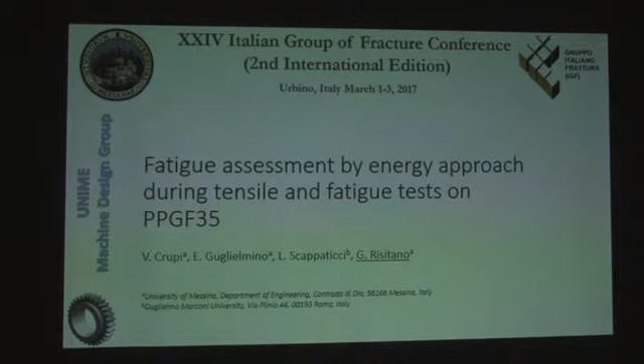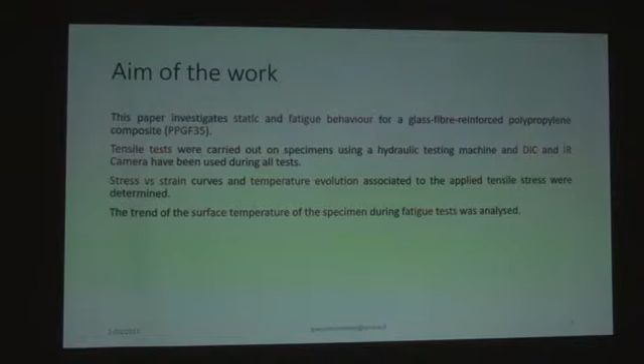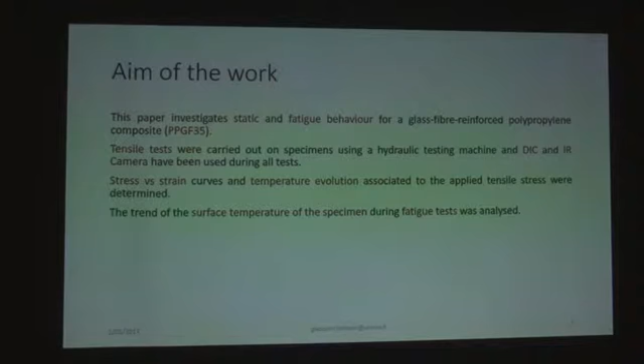For this work, tensile test and fatigue test were carried out with the hydraulic testing machine, and during all the tests we used an IR camera to measure the surface temperature, to detect the surface temperature evolution during all the tests, the tensile and the fatigue test.

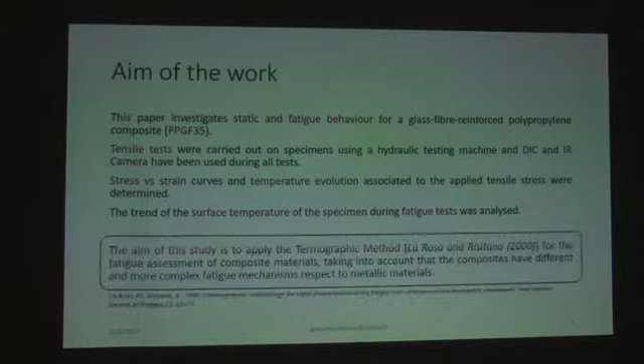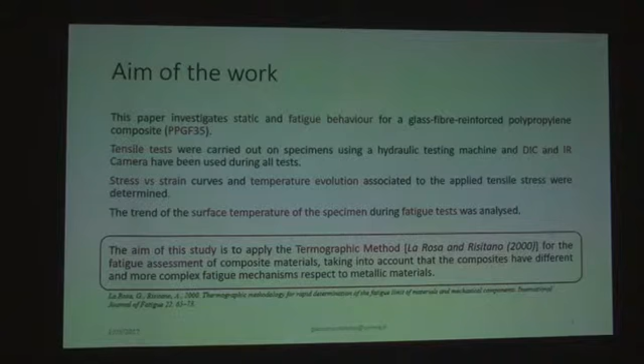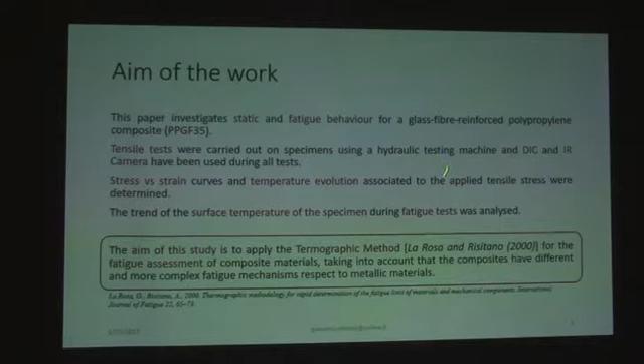The aim of our study is to apply a thermographic method presented by La Rosa and Risitano 17 years ago for the fatigue assessment of this material, taking into account that composites have a different behavior to more complex fatigue mechanisms with respect to metal materials.

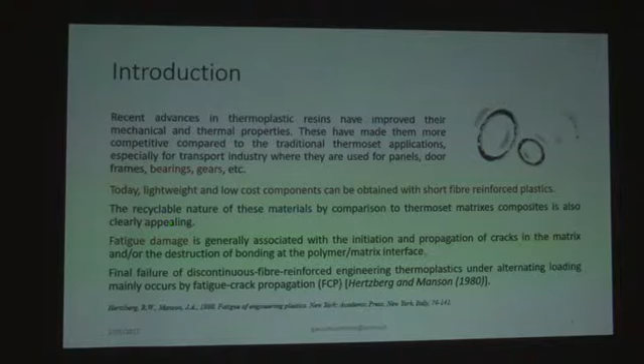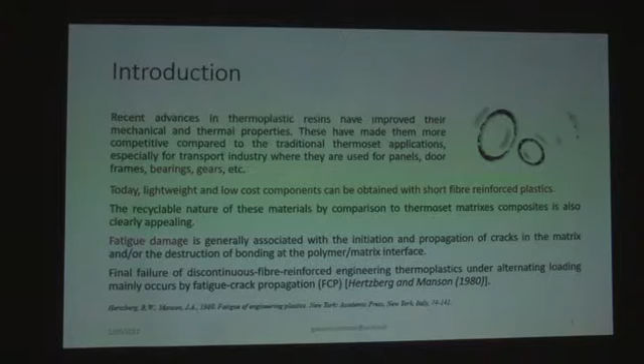These materials are used for structural components like bearing gears for the lower cost, and the failure is normally a fatigue failure.

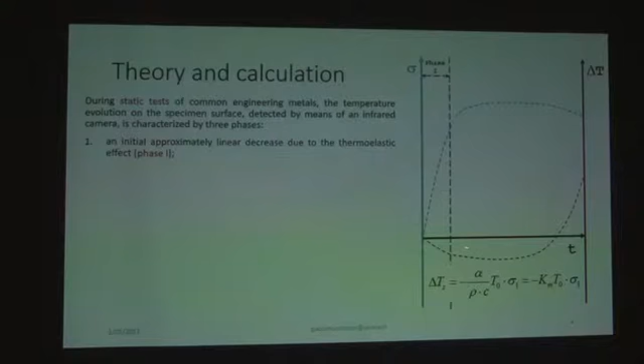During a static test, you can see with the red curve the surface temperature evolution, and you have three stages. The first stage is the thermoelastic equation that you see as a linear decrease of the surface temperature.

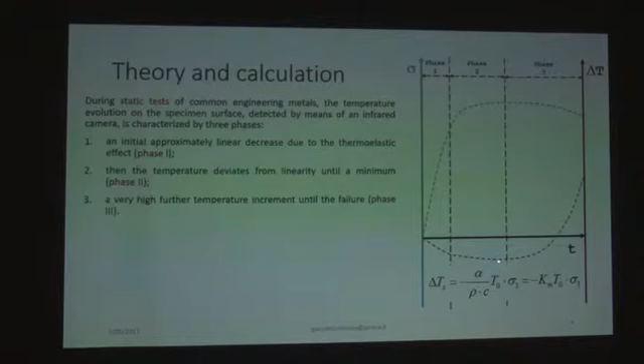The second stage, you have evolution of the temperature, a deviation from the linearity, and after, the third stage, you have a high increment of the surface temperature until the failure.

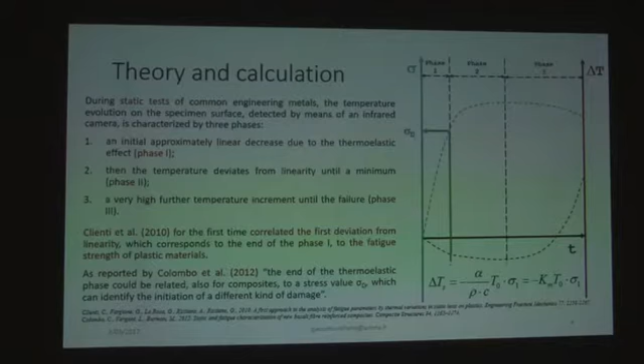For the first time, Clienti et al. in 2010 correlated the deviation from the linearity, which is the end of phase 1, with the fatigue strength of the plastic material.

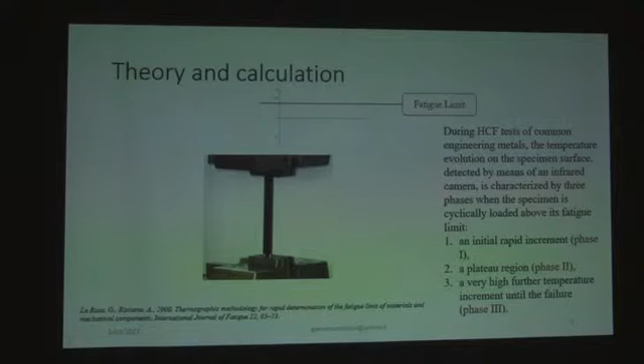A short summary of the thermographic method: if you have a fatigue test under the fatigue limit, and then you use an IR camera to detect the surface temperature, if you are under the fatigue limit, you see the red curve with no variation of the surface temperature. But if you are over the fatigue limit, you can see three stages of the temperature.

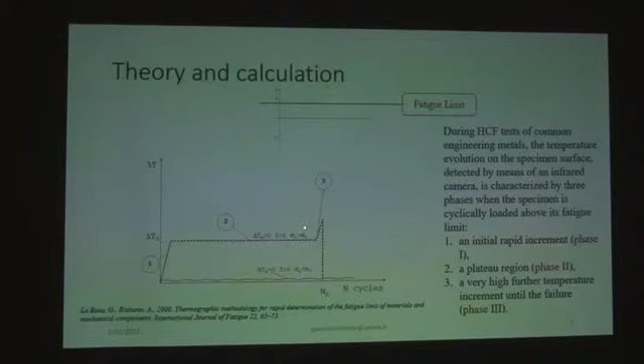One is an initial rapid increment of the temperature. A second stage, very big, where you have a plateau and a temperature stabilization. And after, until the failure, you have the third phase where you have a new high temperature increment.

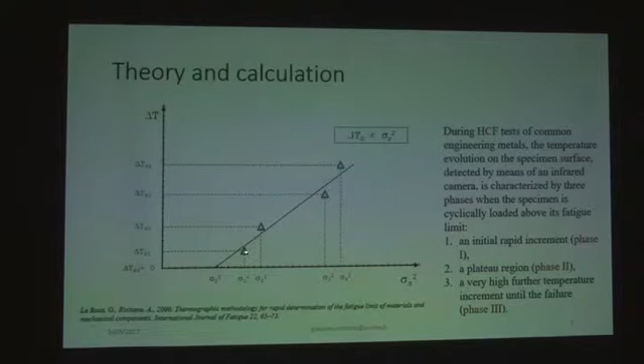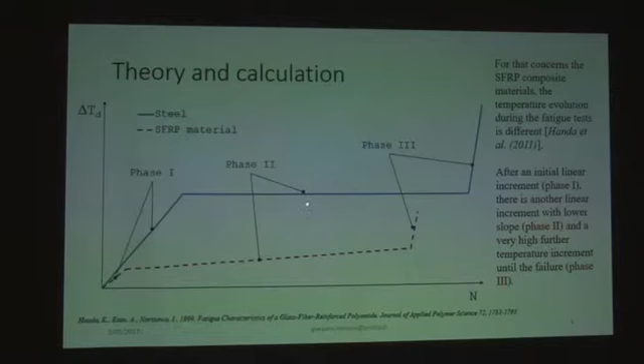Now, Handa in 2011 showed that for this material, short fiber reinforced polymer material, you have phase 1 and phase 3 similar to metal material, but the second phase is different because you have an increment, but with a lower slope.

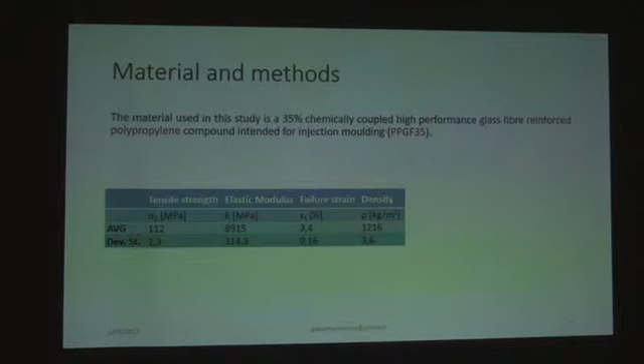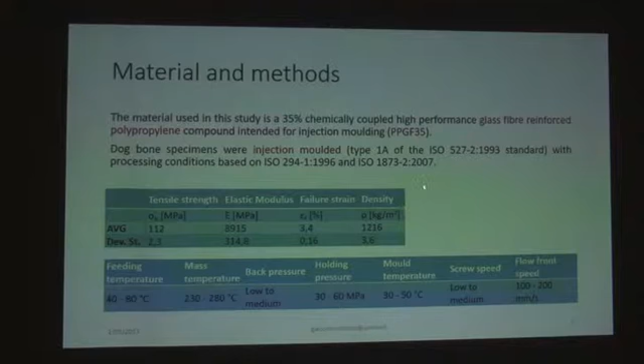The material used in this study is a glass fiber reinforced polypropylene. These are the mechanical parameters, and the specimens were injection molded with these parameters. This is the shape and the geometry, the dimensions of our specimen.

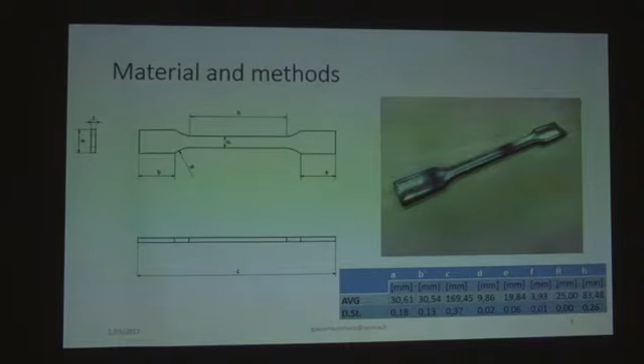The tensile tests were carried out on a servo-hydraulic ITALSIGMA machine at a crosshead rate of 5 millimeters per minute, on 15 specimens. During the test, we used the DIC technique and a FLIR camera.

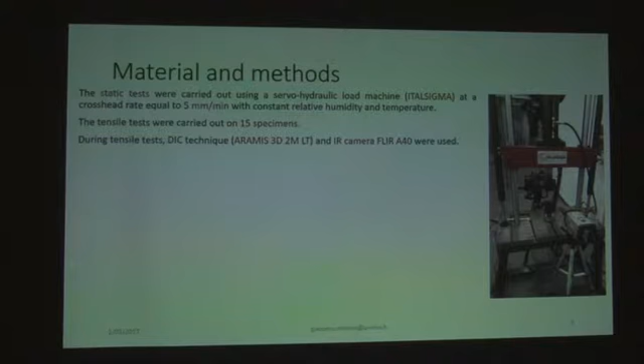The fatigue test was carried out on another set of 15 specimens with a load ratio of minus 0.1 and a test frequency of 5 Hz.

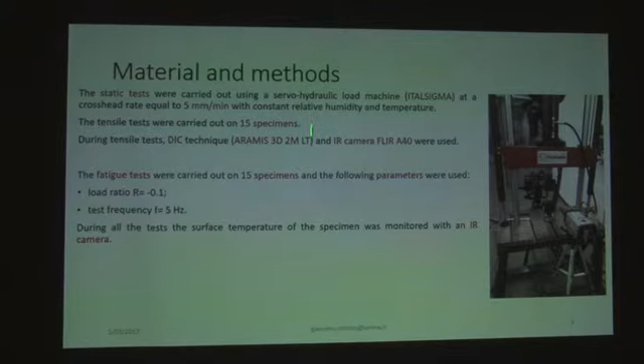During all the tests, we used a similar IR camera. The humidity and temperature in the lab are constant, at 23 degrees Celsius and 50% humidity.

Two types of tests were performed for the fatigue test: one series of 11 specimens with constant load, and for 4 specimens we carried out tests with an increment load step.

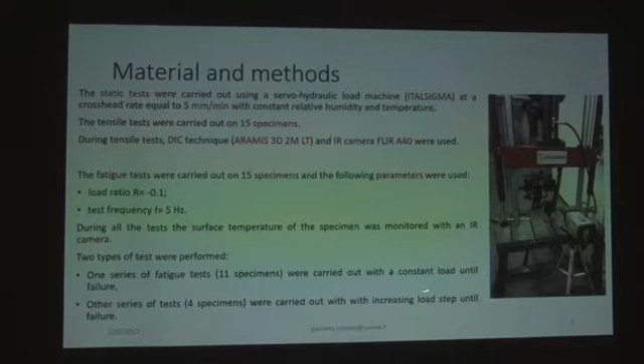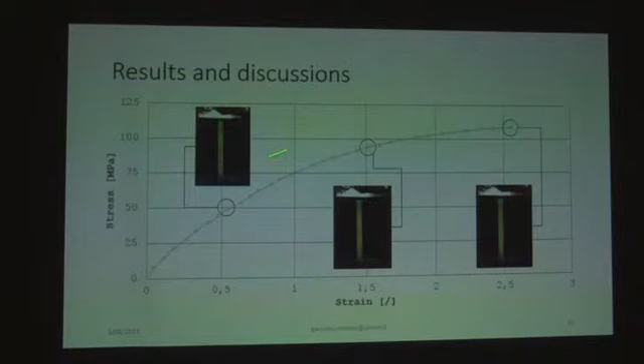In this slide you can see the stress-strain curve, and some pictures about the DIC, and you can see the strain of the specimen during all the tests. For all the tests, the behavior is similar.

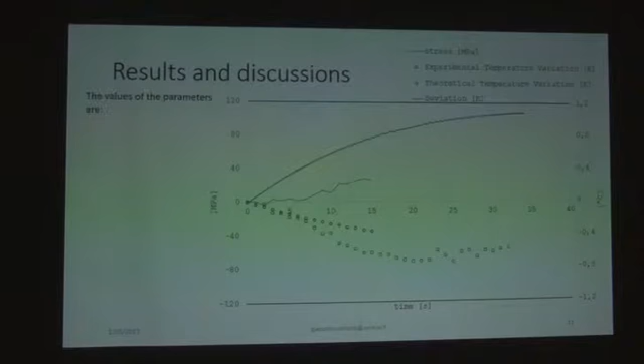This is an interesting slide. In blue you have the stress curve versus time, and in green squares you can see the surface temperature variation detected by the camera. The red circles are the theoretical temperature variation by the thermoelastic equation, using these parameters.

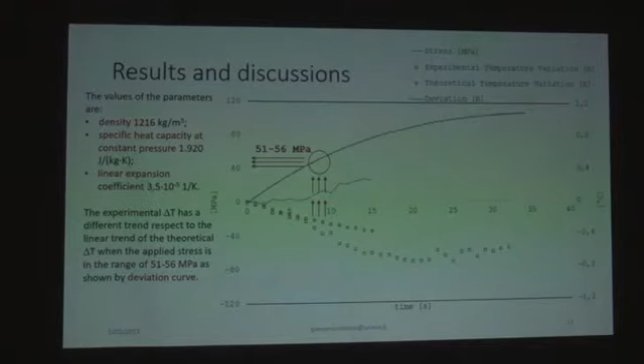The black line is the deviation of the experimental temperature variation from the theoretical temperature variation. You can see that there is a difference for a stress of about 56 megapascal. Remember these values.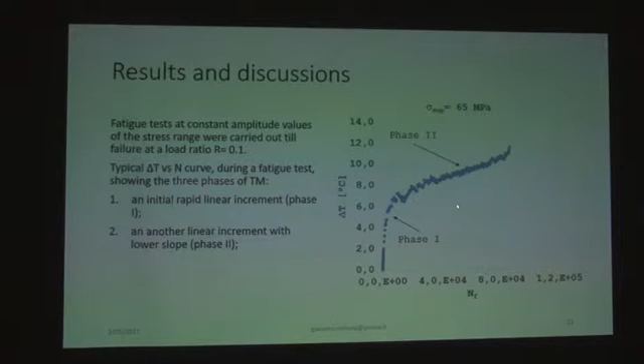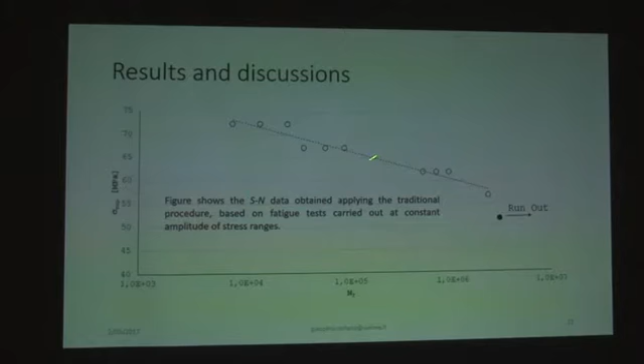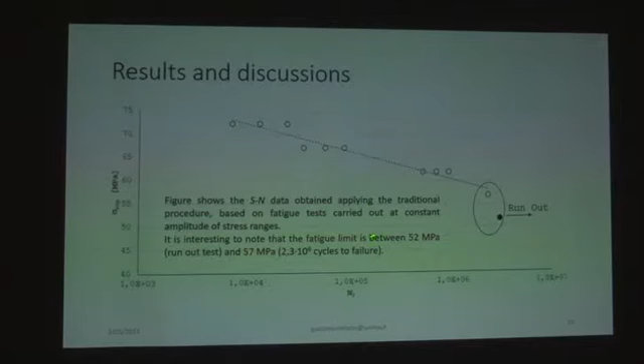This is the SN curve obtained by the traditional method, and it's very interesting to see that the fatigue limit is between 52 and 57 megapascal.

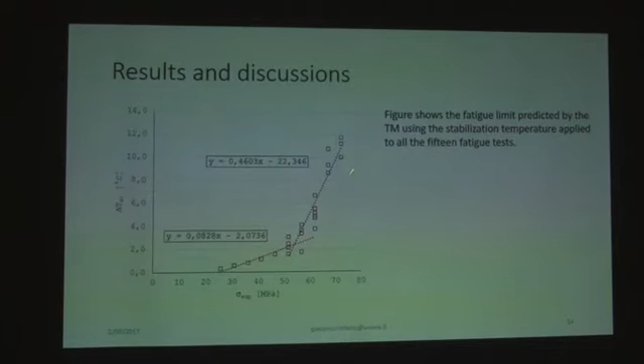If you use the thermographic method with the surface temperature of phase two, you can see a fatigue limit of 54 megapascal.

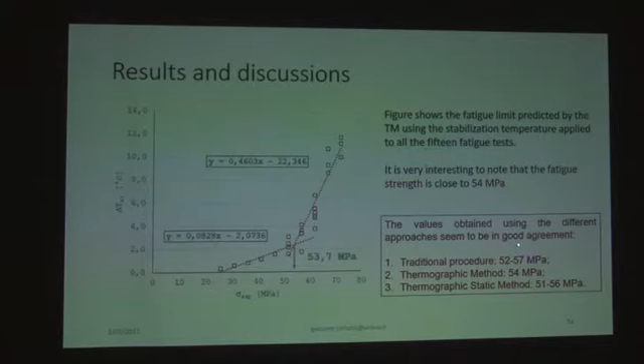In summary, with the traditional approach we have this value of fatigue limit. For the classical thermographic method during fatigue test, we have this value, and with the new thermographic static method, you can see this value.

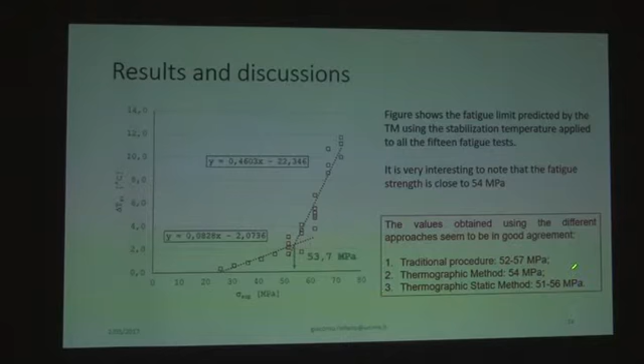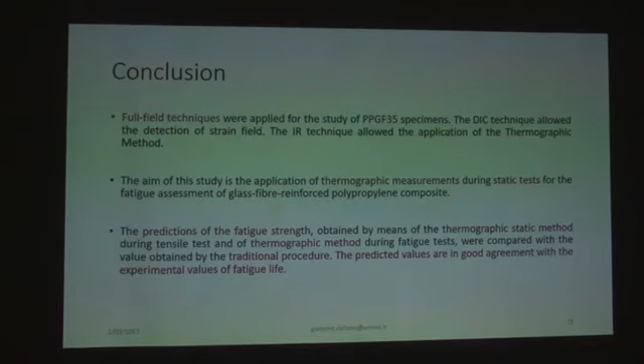In conclusion, we used a full field technique for the strain field, and a full field technique for the temperature of the specimen, and we can see that there is good agreement between the experimental value, the classic thermographic method, the new approach we propose, and the classical method to obtain the fatigue limit.

Thank you for your kind attention.